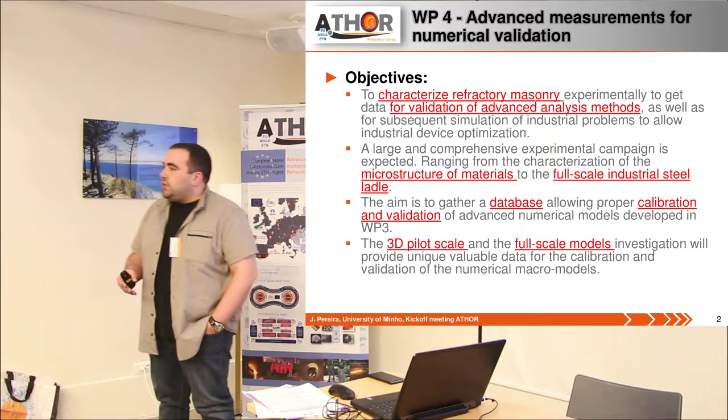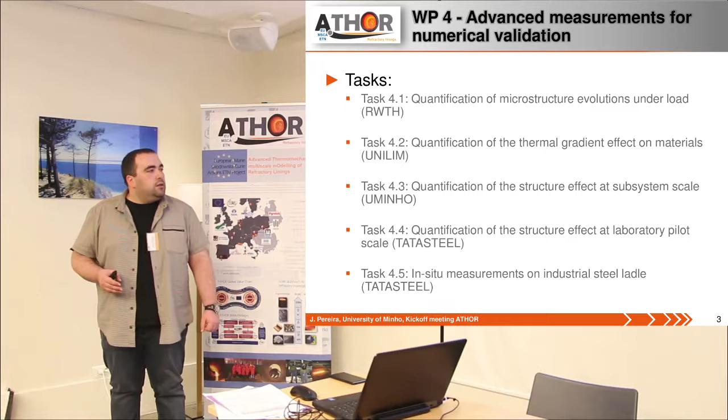In terms of structure, we have 5 different tasks. The division is quite straightforward as well. It's mainly related to the scale of the tasks to be performed. So we have quantification of the microstructure. Then we have the effect on materials at the sample scale, at bricks. We have the subsystem scale, so wallettes or walls. Then we have the pilot laboratory scale, which is the 3D pilot model. And then we have the in-situ measurements on the actual steel ladle.

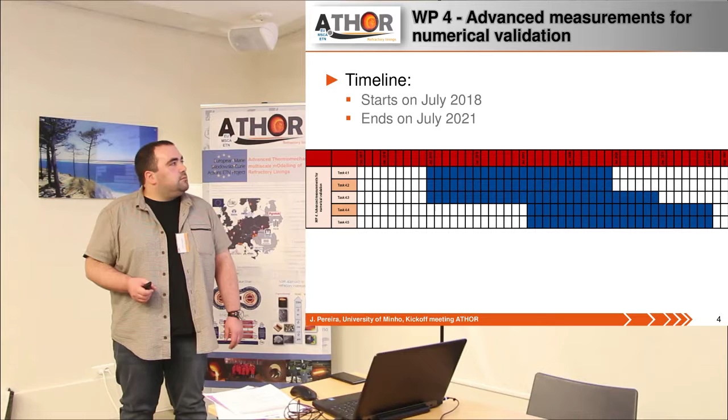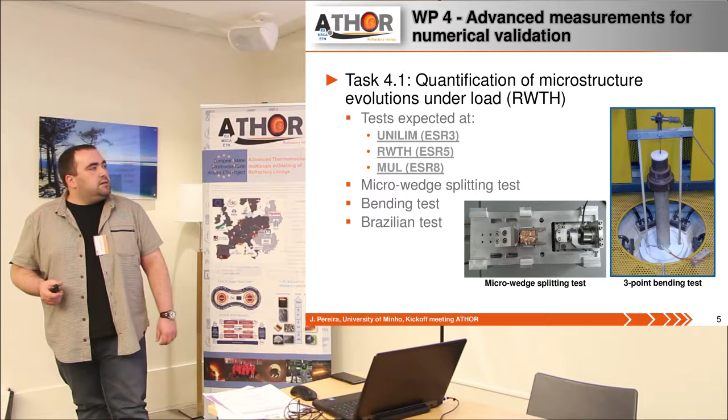In terms of dates, this work package should start in the middle of this year and should end in the middle of 2021. So the first task, related to the microstructure, we have tests expected at these 3 different locations, at Limoges, Aachen and Leoben. 3 different students. These are some of the tests they are expected to perform. Okay.

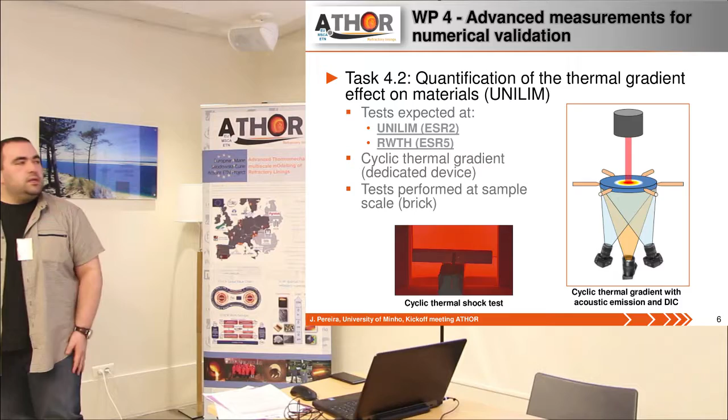The second task is the thermal gradient effect on materials. So this is the sample size or brick. We have tests expected at Limoges and Aachen, 2 different students as well. These are some pictures of examples of tests. These were not tests actually performed at this point. Then we have the subsystem scale, so small walls or large walls. Here we have 2 main contributions in terms of institutions. We have RHI Magnesita. I apologize for leaving only RHI over there. And my university, my research group, so ISISE, which is University of Minho and part of University of Coimbra.

And here we have the biaxial compression test at RHI Magnesita. And we have the tests on uniaxial compression on walls. Sorry, not this one. Here. So this is the large vertical furnace we were discussing just a moment ago, the 3 meter wall. We can test walls up to 3 meters, but in this case without any mechanical load, only thermal load. Okay. But we can do smaller walls, and we can have thermal load and mechanical load at the same time as well.

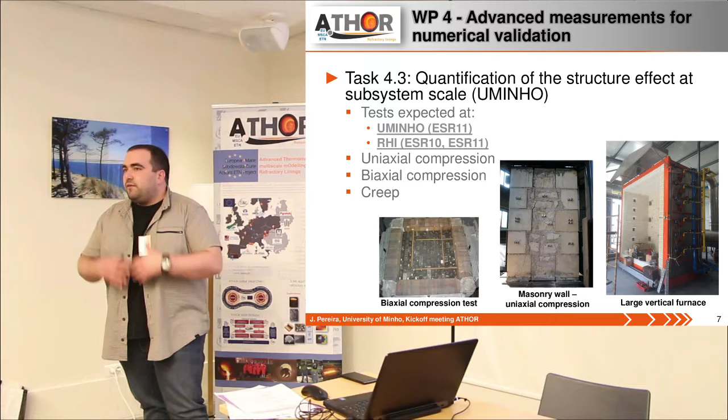So we have a lot of experience with general masonry, in both experimental and numerical studies. We're quite good at that. In the specific case of refractories, this is actually a new field for us, so we are looking forward to learning a lot of new things. Here we have a lot of different possible combinations. We can have joints with mortar, without mortar. We can have thermal load on one side, on both sides. We can have mechanical load as well. We can have constant or a gradient. We can have mechanical tests after thermal exposure or at the same time. So we have a whole field of possible combinations. And we also have brick tests as well.

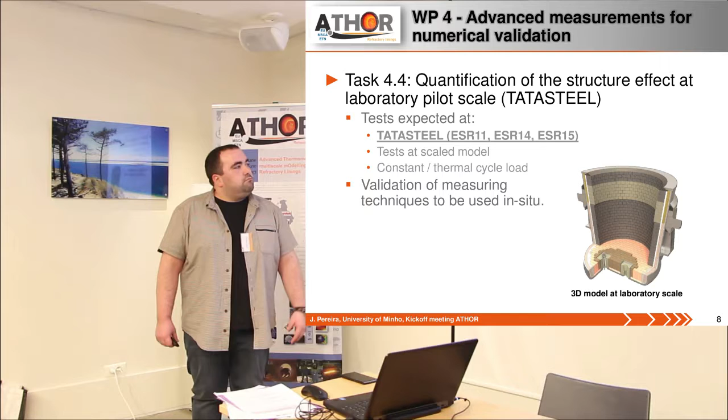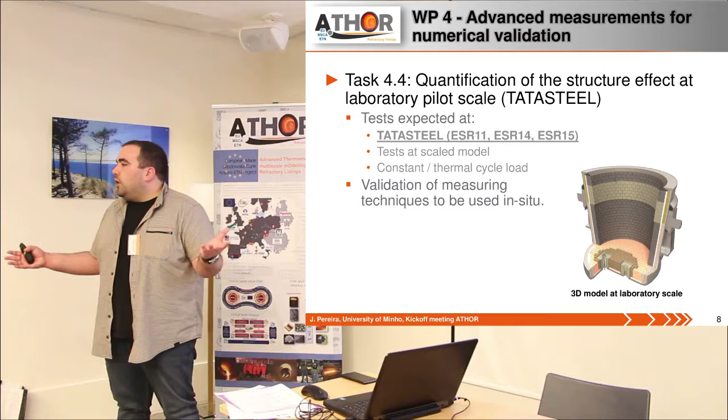Then we have the 3D pilot model, which is one of the innovative parts. This test will be performed at Tata Steel, with the collaboration of those 3 ESRs. So this is quite a new thing, I think, for all of us. And then lastly, we have the in-situ measurements at the Tata Steel ladle. A moment ago we were discussing what kind of measurements we were going to have. We're still debating some of the measurements, but this is mainly, as the whole work package, to validate the numerical models developed in work package 3. Hopefully the results won't make the guys from work package 3 have to change the parameters too much to match the results.

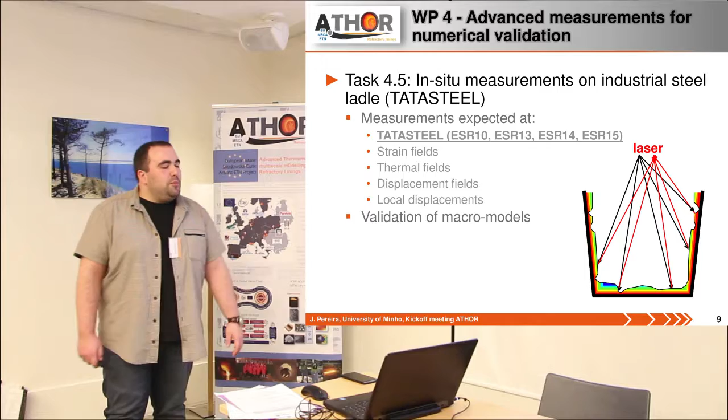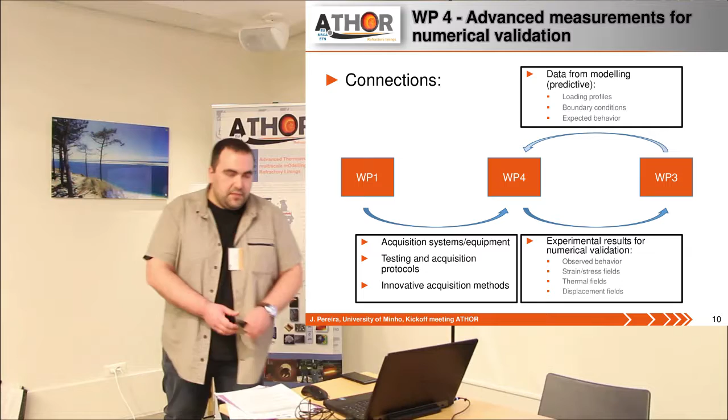Just a small remark. In the wall furnace, we can apply, and we should apply, at least a serviceability load on the wall. We can apply what? Sorry? A load, a serviceability load. Okay. Because without load, it's not realistic. No, when I say mechanical load, for me a mechanical test is until collapse. So in that furnace we cannot do it because the wall is too big. I'm assuming the values needed to collapse the wall are extremely high, and I'm sure we don't have the equipment. What would be the maximum load you can apply? It depends.

For the smaller walls, I think we had this discussion a while ago in a co-supervised master thesis on normal masonry, and I think it was maybe 1,000 and something kilonewtons, because we have the actuators, but we need to move them to the place where we have those smaller furnaces. So we need to play around with the size of the wall itself, because if the wall is too big, we need a higher load. So there's a lot of things we need to address and refine before the actual test.